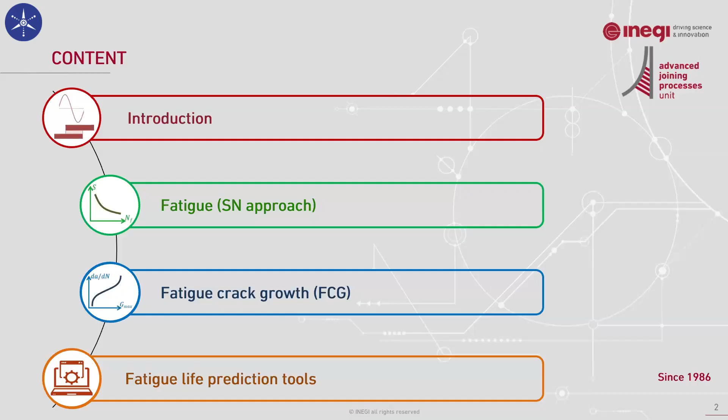A correct selection of material, correct and reliable design, well-planned and properly scheduled maintenance and repair, and development of accurate models for predicting adhesive joint behavior all require accurate and reliable material characterization.

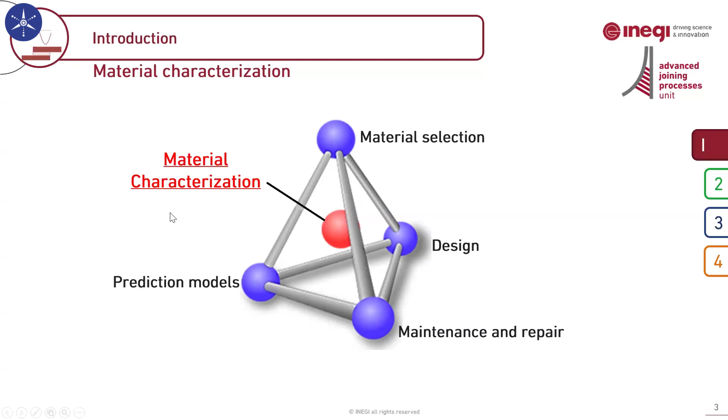So material characterization is key. It generally involves two main stages. First is selecting the appropriate experimental setup, including choosing the right specimen, defining the boundary conditions, setting up correctly the loading condition, and selecting an appropriate measurement instrument.

If everything goes well, we will have the raw data, but the next important step is to treat this data, which is one of the most critical steps in obtaining accurate material properties. A poor choice in data reduction method can easily lead to inaccurate estimation of the material's behavior.

When these steps are performed correctly, we have everything ready to perform a simulation. And in case we select a suitable numerical model, we will be able to simulate the material's behavior in a way that matches the experimental results very closely.

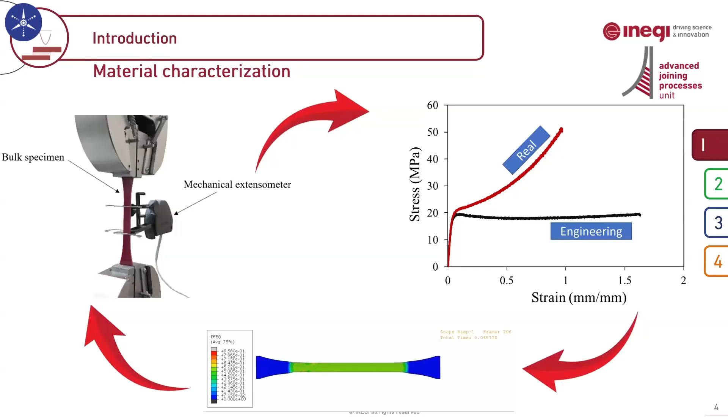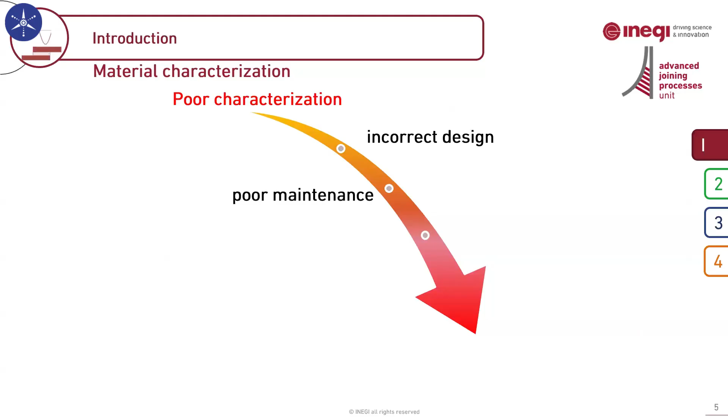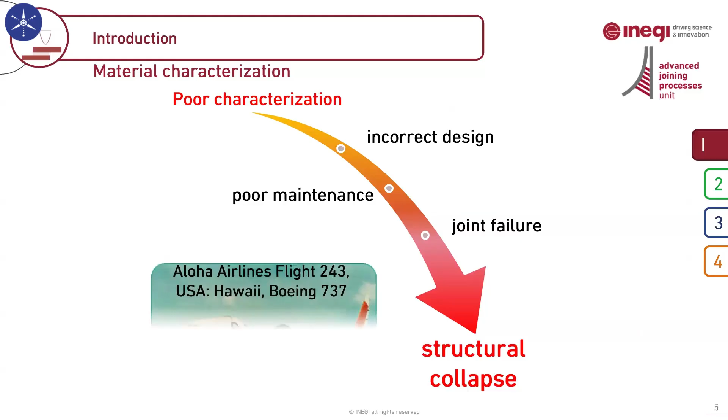If any of these stages fail, it means that we will have the material poorly characterized. Poor characterization leads to inadequate design and poorly planned maintenance and repair schedules for adhesive joints, which in turn increases the risk of joint failure during service. Such a failure can even trigger the collapse of the entire structure, which is, of course, can be a complete disaster.

Characterization can be even more complicated when the loading is not static, but fluctuates over time, which is common in real structures. In this case, fatigue damage becomes the main concern. And if the loading is of variable amplitude, which is the most common loading condition in practice, then characterization can be even more complex.

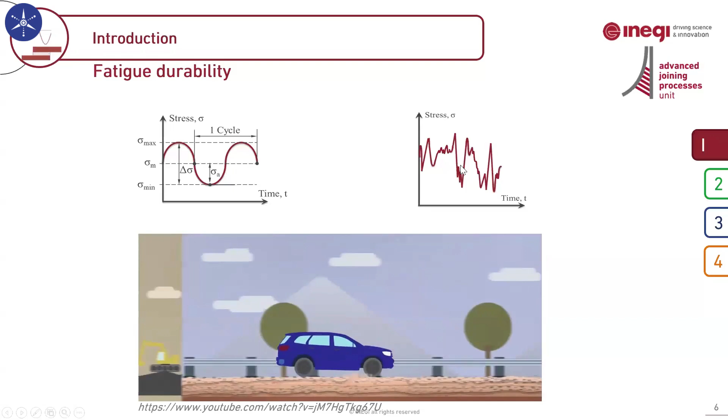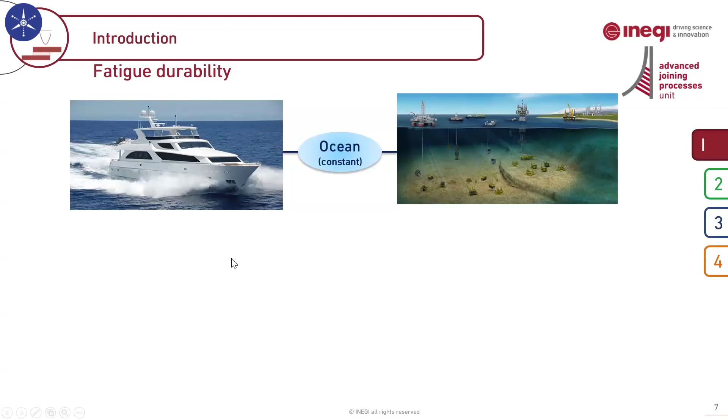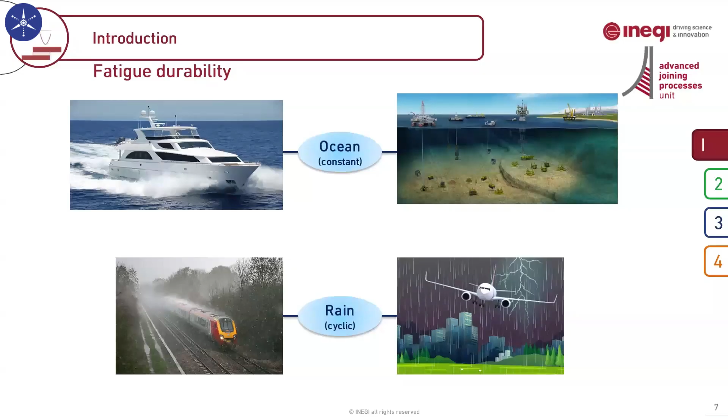Now, imagine your structure is in a humid environment, then you must take into account the effect of humidity, especially for adhesive joints, because adhesives are really sensitive to humidity. And if we make the scenario even more realistic, this moisture level may also vary cyclically, meaning both the loading and environmental conditions are cyclic. You can imagine how complex it becomes to characterize the adhesive's behavior and predict fatigue life under such complicated conditions.

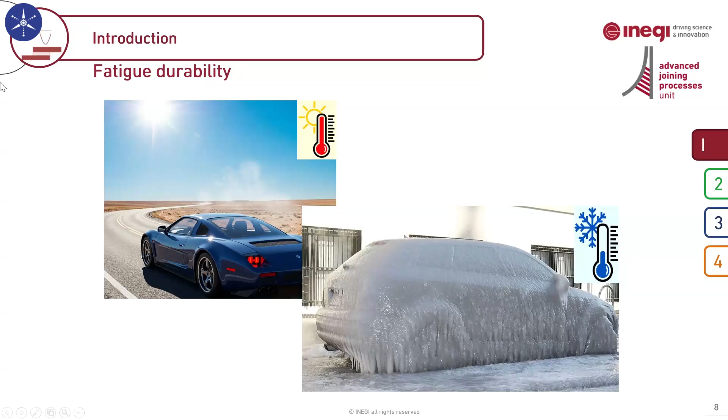And on top of that, of course, we have temperature. In practice, the joints are subjected to a wide range of temperature in service, very low and very high temperatures. And we have to take into account the effect of temperature in addition to all the other parameters that I just mentioned.

Our research group, Advanced Joining Processes Unit, has already completed successfully several projects and is currently also working on multiple industrial projects dealing with fatigue in adhesive joints. These projects have been carried out in collaboration with leading industrial partners, ranging from adhesive manufacturers to end users in various industrial sectors, such as automotive, energy, agricultural, machinery, aerospace, steel, electronics, and even semiconductor industry.

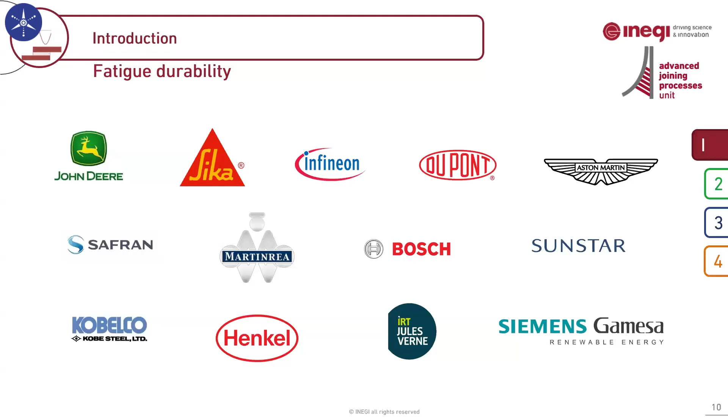Okay, now let's talk a bit more about fatigue in adhesive joints, and I'm going to share with you some of the results that we have obtained so far in these projects.

Fatigue in adhesive joints can be analyzed from two different perspectives. The first one is the SN approach. Here we should obtain a master SN curve. That's the key part of the SN approach methodology.

And with the help of finite element analysis, plus this master curve, plus an effective or fatigue parameter that we should develop or select correctly, we will be able to predict the fatigue life of adhesive joints in real practice. We also have another scenario, another approach based on SN still, but without this master curve, where we will have ideas about the fatigue of adhesive joints based on SN approach, but I will talk about it shortly.

On the other side, we have the fatigue crack growth approach. Here we have a Paris law curve. Again, similar to SN approach, here we should develop and construct a master Paris law curve. So to obtain the master Paris law curve, it's really important to select an appropriate Paris law parameter.

Similar to SN methodology, the challenge here is to understand what's the suitable and appropriate Paris law parameter. In case we select a correct one, then we will be able to collapse all the Paris law curves obtained for different loading and environmental conditions into a single curve, which we call the master Paris law curve.

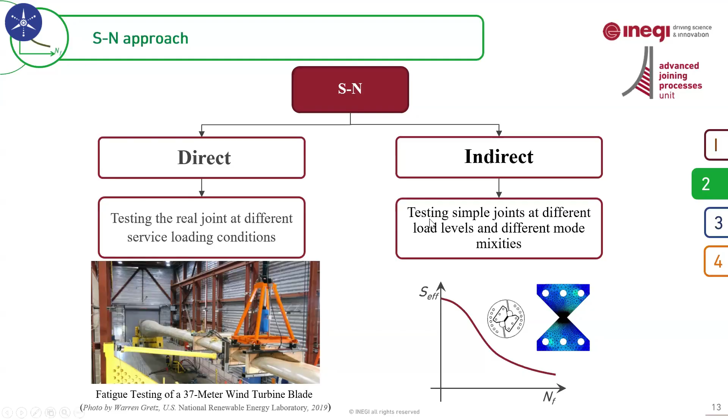Direct methodology can be a bit simpler and less costly, where we can test subcomponents, or perform tests at subcomponent level. We have done this before in our group in some projects. For example, in one case,

we replaced a welded joint with an adhesive joint in part of a boom structure used in agricultural or construction vehicles. The company asked us to perform this replacement and analyze the fatigue response of the welded joints compared to bonded joints. Interestingly, we found that the bonded joints can provide a much longer fatigue life than welded joints, especially for the high cycle fatigue regime.

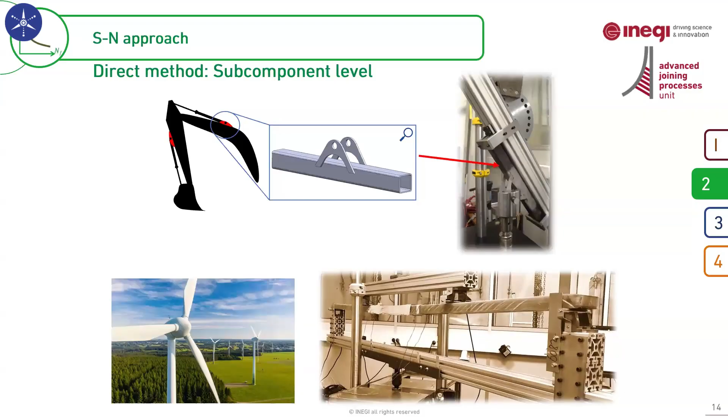Direct method can actually be simplified even more by testing a representative bonded joint specimen instead of a real subcomponent. For example, instead of testing the full boom connection, we could test a single lap joint, because here it's actually a single overlap joint that we can use instead of testing this. Or for skin-to-stiffener tests as part of a fuselage, for example, we can do the test on T-joints with the same substrate materials and adhesive.

Another example is the repaired patch, usually composite patches used for repairing pipelines or even skins. Instead of testing at the subcomponent or full scale component level, we can perform tests on an oversimplified joint, such as a scarf joint or double strap joint. At this level, no special equipment is needed, and the results may be applicable to joints with similar geometries in other structures as well. These are the good advantages of these oversimplifications.

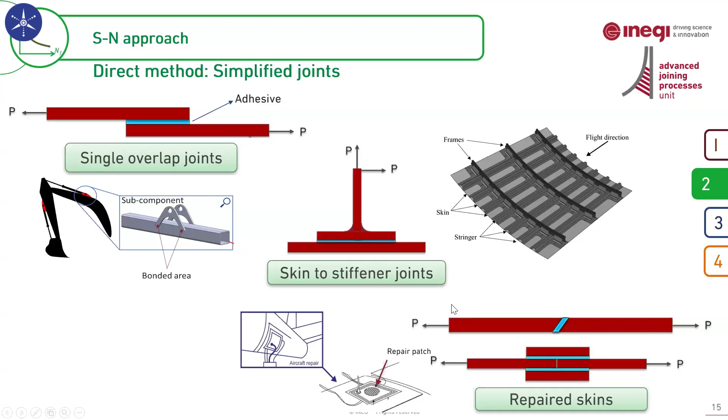On the other hand, we have the indirect method. From the experimental perspective, the key difference in the indirect method is that you must test simple bonded joints under pure loading modes - pure mode 1, pure mode 2, even pure mode 3. So, for example, a single lap adhesive joint is generally not suitable for this approach unless under some specific special conditions. In our work, we have used the Arcan specimens for this purpose.

This specimen meets the requirements for fatigue analysis in bonded joints. The Arcan has the advantage that you can change the loading angle without changing the specimen geometry, the setup, the boundary conditions, or the joint type. And as I mentioned before, the most important challenge in indirect methodology is to select or develop an equivalent fatigue parameter or stress parameter that can take into account the effect of all the important factors that change the fatigue life of that adhesive.

It can be as challenging as a 3 years PhD project, and that's one of the most challenging parts of the indirect method. So despite the relatively simple test that we can perform in this method, the post-processing part is very challenging. But as long as we have this S-effective developed, we are able to construct a master SN curve.

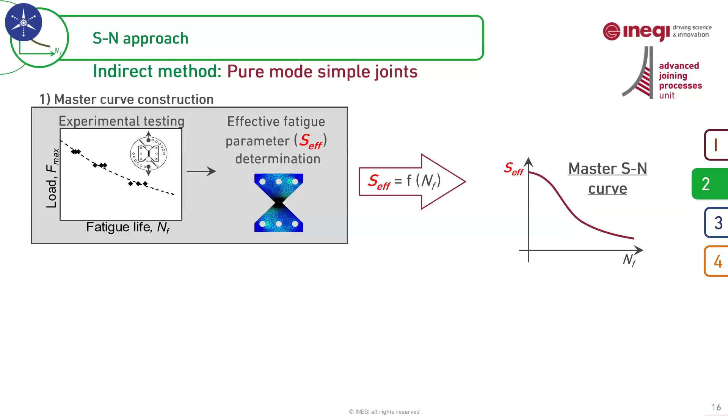Once the master SN curve is obtained, a finite element analysis of the actual joint should be performed, and the fatigue damage parameter S-effective can be extracted from the FE results. By using the master SN curve, we will be able to predict the fatigue life of the real joint. But please be careful, because here we are talking about prediction, not obtaining the real value. This is another important difference between the indirect method and the direct method.

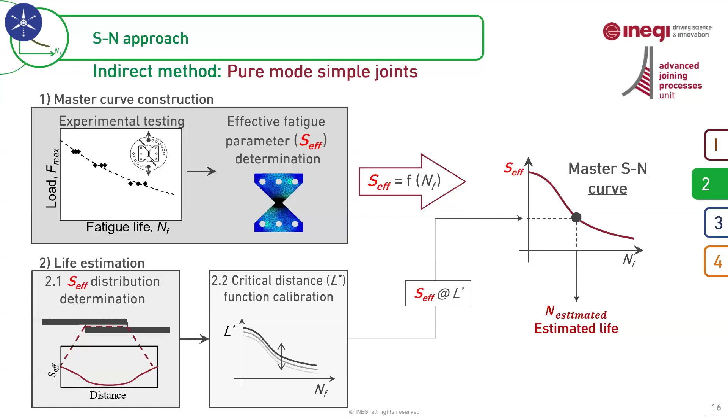Our research group has conducted several indirect method projects as well, in collaboration with various industries and companies, and I'm going to share with you some of these results.

One of the most important parameters that must be analyzed experimentally when using the indirect method is the effect of loading mode. So we have to analyze this effect by changing the loading angle from pure mode 1 to pure mode 2.

In several tests performed on many different types of adhesives, we obtained a consistent finding: the highest fatigue life occurs for pure mode 1 compared to pure mode 2. It means that if joints are subjected to pure mode 1 loading under cyclic loading, they provide a much longer fatigue life than pure mode 2, sometimes by a factor of 10 or even more. If a joint under pure mode 1 lasts 10 years, the same joint under pure mode 2, under the same fatigue load, will last only about 1 year. That's the huge difference between the life for mode 1 compared to mode 2.

But we should note that in reality, stress concentration at the joint edges can strongly influence this result. Stress concentration can produce high peel stresses at the bonding ends or at critical points of the joint, and that can significantly reduce the fatigue life under tensile loading. That's why shear dominant design is still recommended.

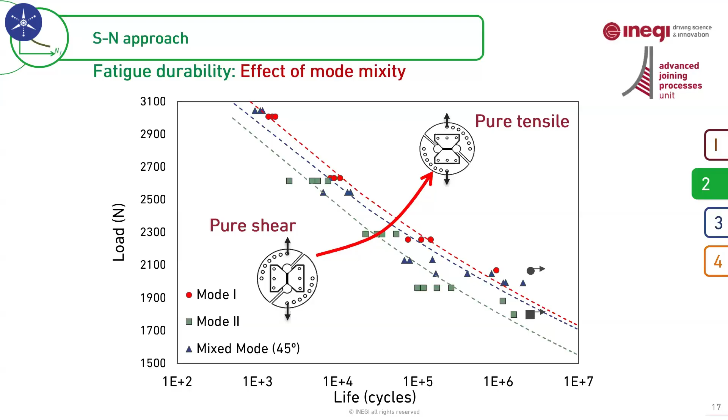There are other reasons why shear loading is better than tensile, and why we have to design joints to be loaded mainly under shear rather than tensile. One of them is the effect of temperature. When we tested joints under high temperature, we noticed that the sensitivity of mode 1 to high temperature is much higher than mode 2. This finding reinforces again the importance of designing joints to be loaded mainly in shear.

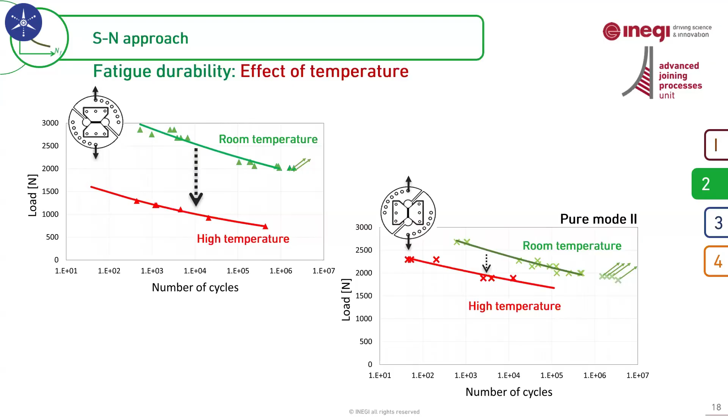Another parameter we analyzed is the effect of moisture. We performed similar tests under humid conditions. Again, moisture causes a substantial reduction in fatigue life in both loading modes, but mode 1 is much more sensitive to moisture than mode 2. That's one of the reasons, again, that designing joints to be loaded in shear is recommended.

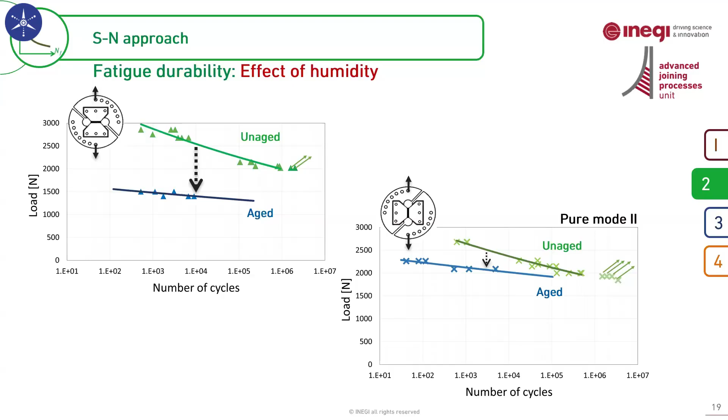I talked about cyclic humidity in the introduction, and we have investigated this phenomenon in detail in a PhD project in our group, with several important findings. One key observation is that the moisture ingress rate changes from cycle to cycle and stabilizes after a few cycles.

We found that the rate of water uptake, the diffusion coefficient, is much higher under cyclic aging than constant aging. It means that if the environmental condition is cyclic, the joint will experience a higher rate of degradation in properties than under a constant humidity level. This means that for characterization of adhesives in terms of humidity, if you perform a constant aging test for a joint that in practice is subjected to cyclic aging conditions, you will most probably overestimate the service life, which is dangerous for a critical design.

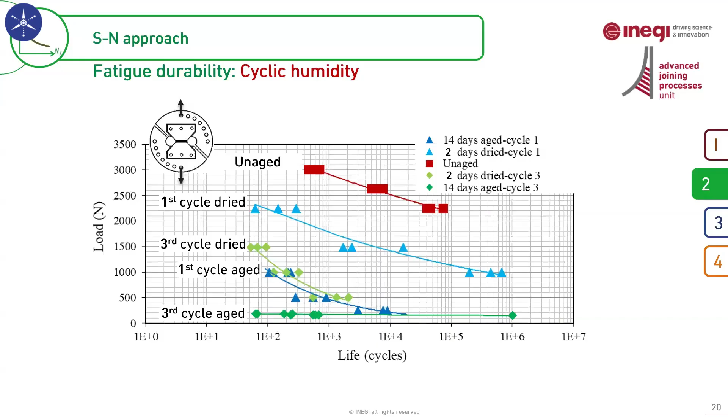It means that even without performing tests or experiments, we are able to have a very rough idea about the fatigue life in case we know what the load ratio is.

Our group activities are not only concentrated on experimental studies, but we have also been active in developing fatigue life prediction models for bonded joints. This is one of the most recent SN-based models that we have developed, and it was actually developed in a PhD project. I would say this is one of the most universal fatigue models developed so far for fatigue life analysis of adhesive joints. This model can provide a good prediction of fatigue life for different joint geometries, at different loading angles, different materials, single lap joints with different overlap sizes, different substrate materials, and even at different environmental conditions, humidity, and temperature.

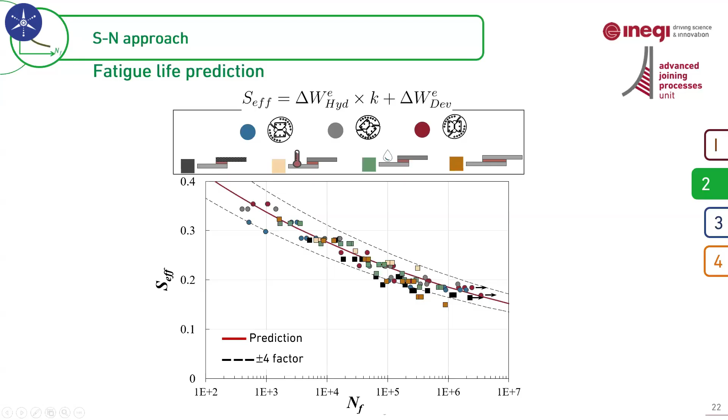Now I'm going to talk about fatigue crack growth. As mentioned before, analyzing fatigue crack growth in adhesive joints is more complex than working with the SN method. Here I'm going to show you some results and share some findings and insights.

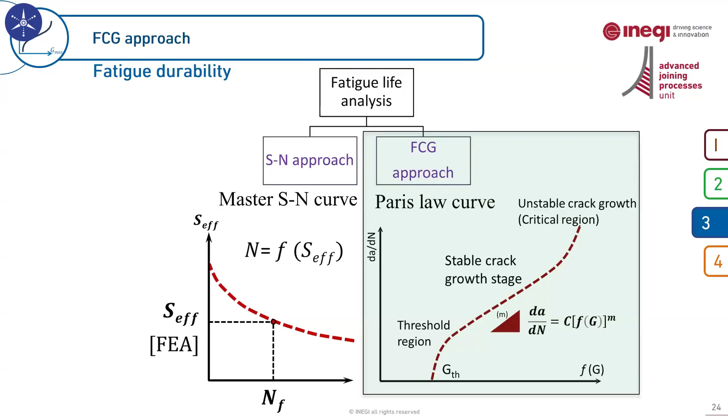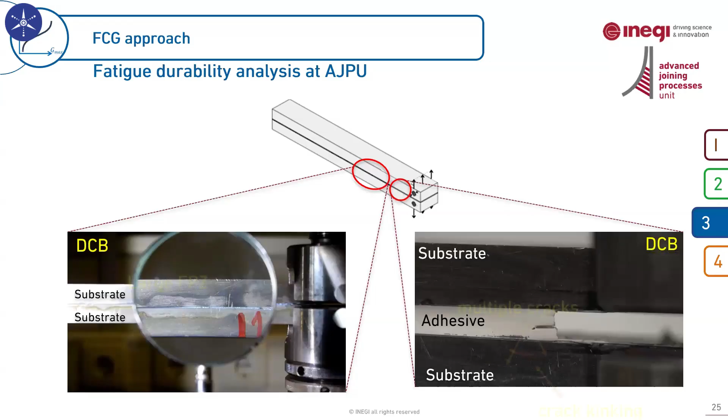Here I show two examples of DCB joints tested under pure mode 1 fatigue loading conditions, and several phenomena are visible in the adhesive layer. We have here a very ductile adhesive with 150% elongation at failure, a methacrylate adhesive. You see a very large whitening area. This is actually a magnifying glass, we try to zoom in a bit more to see the very thin layer of adhesive.

At real size it's hard to see the adhesive layer, but here you see we have a crack, the crack tip is somewhere here, and these are the large whitening area and process zone ahead of the crack tip. The energy here is spent partially in developing this large process zone ahead of the crack tip, and also for opening the crack itself. But we need to be careful here because the crack...

...opens within an already damaged area. So the energy that we finally measure from this test is the energy of the system, both the whitening and damage zone plus the opening. Then using this energy measured cycle by cycle, we can construct and plot the Paris law curve.

On the other side, we have another DCB tested under pure mode 1 loading condition. This is not a very zoomed view. Here we have a very thick layer of adhesive, 4 millimeters thick, and we have also several phenomena here.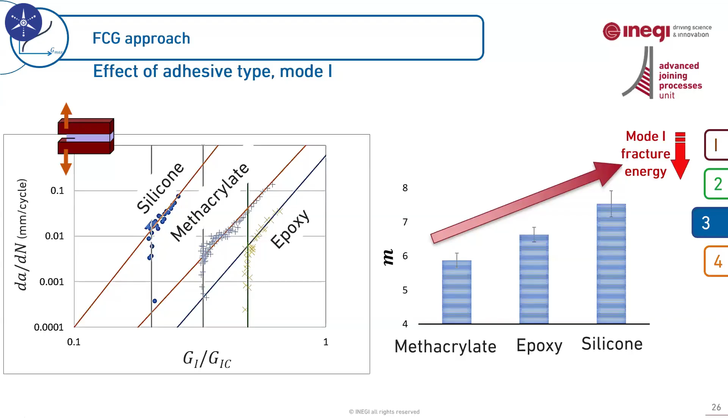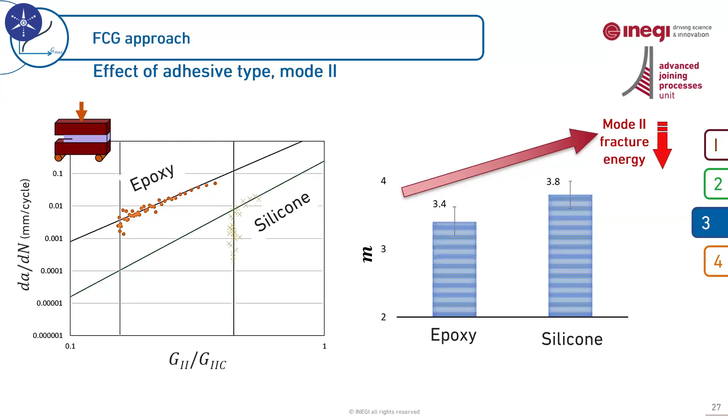But as a general trend, we can say that the lower the mode 1 fracture energy under quasi-static loading condition, the higher the M value under cyclic loading condition. A similar conclusion holds for pure mode 2 loading, where we use the ENF joints for fatigue crack growth under mode 2 loading condition. And again, we can say the lower the mode 2 fracture energy under quasi-static loading condition, the higher the M value under fatigue.

We have also conducted this test under various mixed mode loading angles. And when we plot the M envelope for different mode mixities, we find that despite the large difference in static behavior among the adhesives that we have tested, their fatigue crack growth behavior doesn't differ significantly. The M value more or less remains within a relatively narrow range for all loading modes. But a general trend for all mode mixity is that in case you have a lower fracture energy under quasi-static, you should expect a higher M value under fatigue.

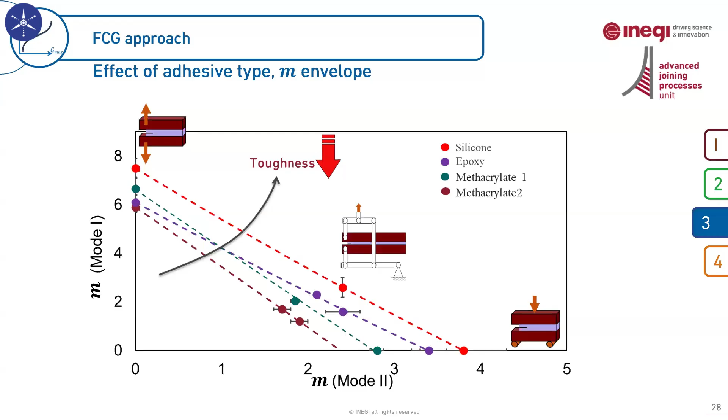I mentioned before that in fatigue crack growth characterization, we need to search for a good Paris law parameter to be able to construct a master Paris law curve. And here are the results. We did this test on a methacrylate adhesive. By changing the Paris law parameter and by including the effect of R ratio, we were able to collapse all these curves into a single curve.

Using this curve, you just need to analyze probably numerically the energy. And by knowing the loading condition, you will be able to know what's the rate of crack growth for all these loading scenarios. So you just need to test one of them, and then you can precisely predict the dA over dN for the other three.

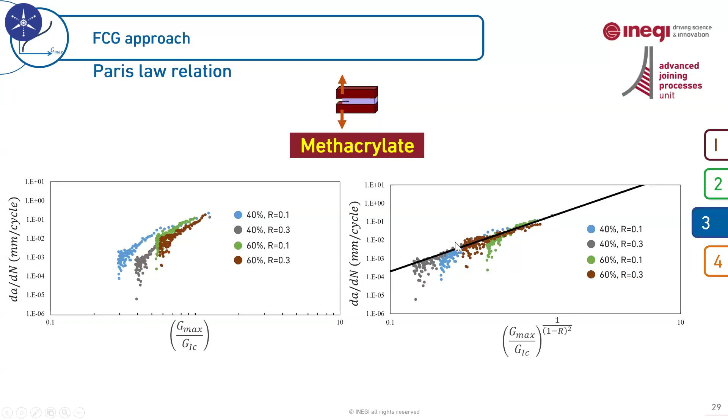That's also very important when we characterize adhesives in terms of fatigue crack growth. We need to try to take into account the effect of all important parameters to be able to construct this master Paris law curve.

Loading frequency is an important but relatively overlooked parameter in research. Fatigue life can be highly sensitive to loading frequency. And by increasing the loading frequency, the number of cycles at failure increases.

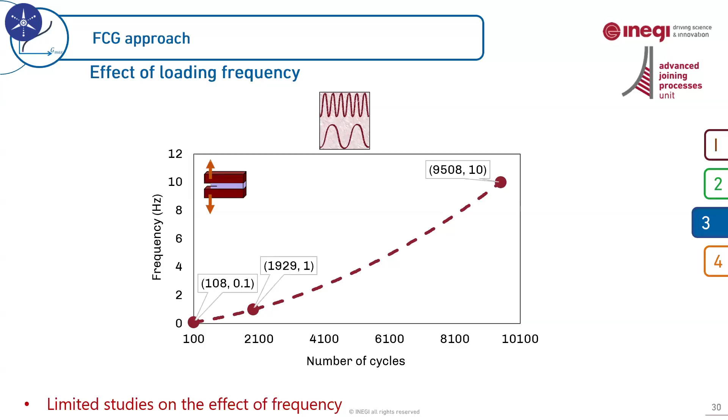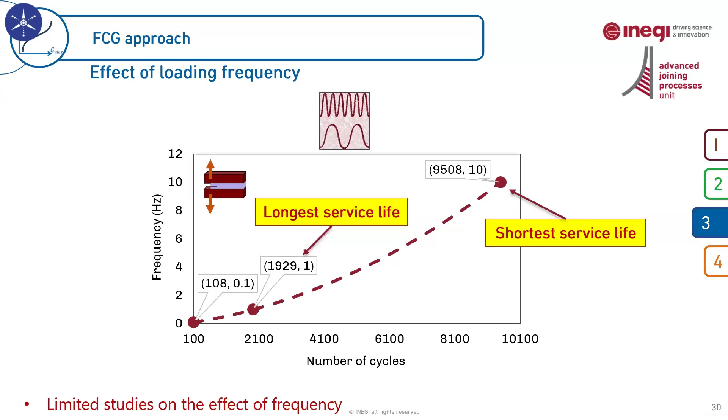While high frequency testing is sometimes used to make the running time shorter, it can easily lead to misleading results and can overestimate or underestimate the service time. Here, for example, in our results, the longest service time occurred at 1 Hertz, and the shortest service time was for 10 Hertz. When we analyze adhesives under cyclic loading, and we change the frequency to make it different from real practice, we need to take into account all these important points.

As we discussed earlier, the Paris law consists of 3 main regions: threshold region, stable crack growth zone, and finally the unstable crack growth part. We have 2 different strategies to analyze the fatigue crack growth in adhesive joints. The test can be load control or displacement control.

In load control, the test starts from a threshold region. Then we move to a stable crack growth part, and then finally the joint fails with an unstable crack propagation.

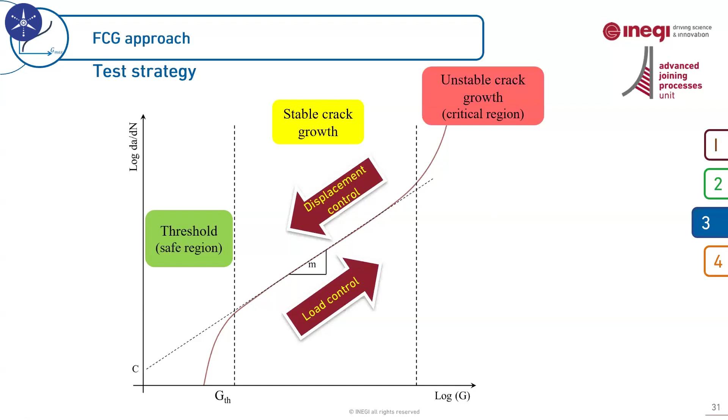In displacement control, the test starts with an unstable crack propagation. It moves backward to stable crack growth, and finally we reach a threshold region. When we reach the threshold region, the crack propagation stops and the joint doesn't fail. In load control tests, usually we need to test several joints at different loading levels to be able to find a real threshold value. But in displacement control, only a single test can be enough to obtain the threshold.

We have analyzed this parameter on adhesive joints, and we noticed that the choice of test method can lead to significantly different results for fatigue crack growth in adhesive joints. Our results for a polyurethane adhesive showed that the threshold fracture energy obtained based on displacement control is a bit lower than the threshold energy obtained based on a load control strategy.

But the good point here is that for both cases of load control and displacement control, the M values were similar. So in case we perform a test under load control or displacement control, probably M would be the same for both approaches, but the threshold might be different. We need to be very careful, especially if you design the joints based on safe life philosophy.

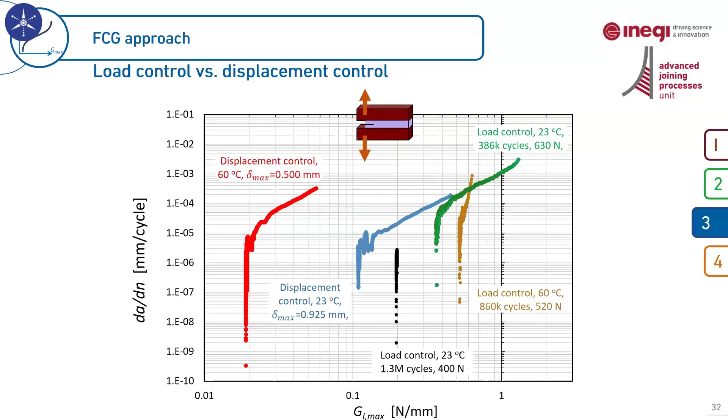Our group has also previously proposed models for various loading modes to predict the fatigue crack growth in adhesives. All of these models are based on cohesive zone modeling. Compared to the traditional SN approach, fatigue crack growth simulation and modeling requires more extensive testing and more knowledge - finite element knowledge, fracture mechanics knowledge - and it's more challenging.

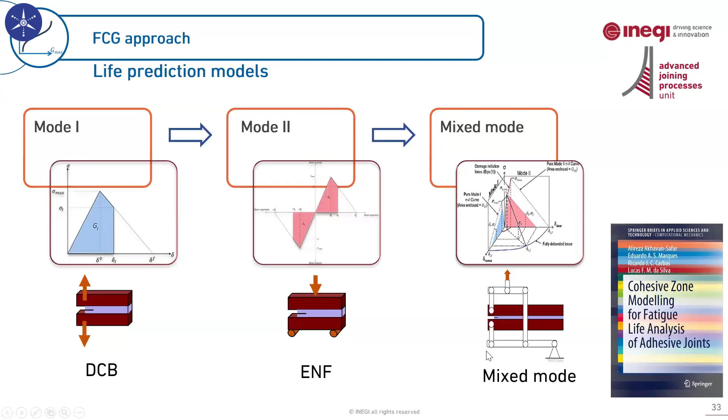We have also actually published a book on using cohesive zone modeling for fatigue life analysis of adhesive joints. This is one of the models that we have developed.

One important point in fatigue crack growth analysis of adhesive joints is to understand and know how the fracture properties degrade cycle by cycle. This is an important parameter. By knowing this degradation rate, we have obtained this formulation to define the rate of degradation, then we know how to degrade the traction separation law used for cohesive zone modeling approach for predicting the fatigue crack growth life of adhesive joints.

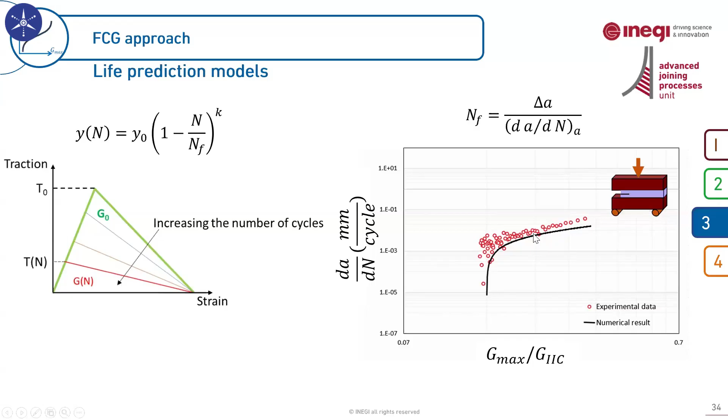And here you see a comparison between numerical and experimental results.

I talked about two different approaches: static SN approach and fatigue crack growth approach for characterization of adhesives. And I mentioned that these are actually really challenging tasks if we are going to characterize real joints in real scenarios, in real world applications, in industries with complex structures and complicated loading conditions. But I'm going to talk about these challenges a bit and also solutions here.

We know that adhesive joints are widely used in aerospace, marine, automotive, oil and gas structures, partly due to their relatively superior fatigue life compared to other joining methods. However, predicting the fatigue life of these joints is actually a challenging task that requires knowledge across multiple disciplines.

And the problem is that we have too many models already developed, and we need to understand which one is the most appropriate one to characterize, simulate, or predict the fatigue life of the joints that we have in our structure.

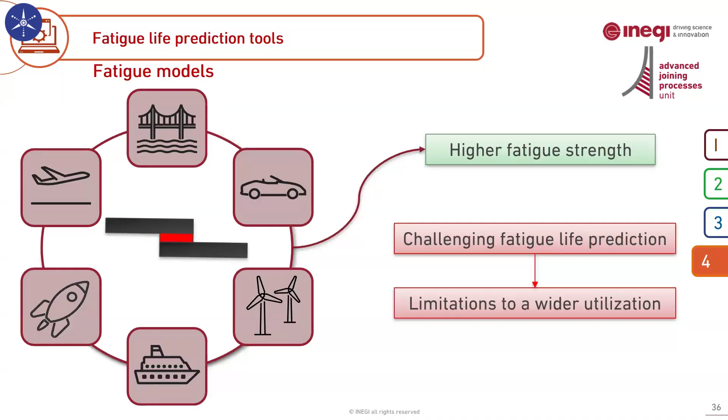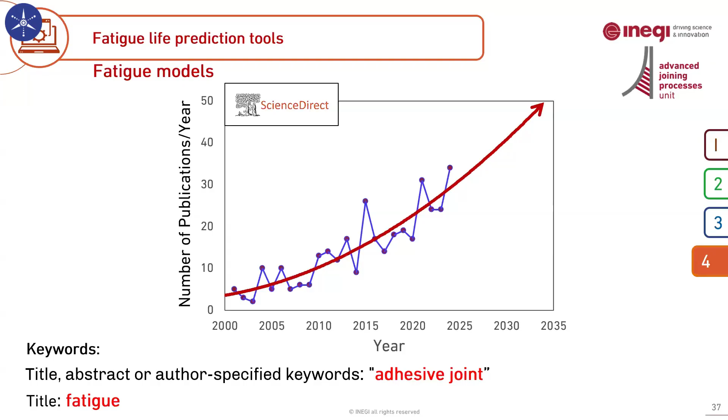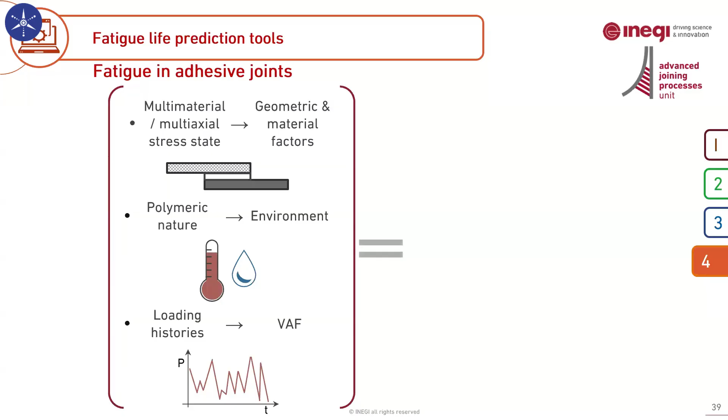But unfortunately, none of these dedicated adhesive joint fatigue models can be found in well-known commercial fatigue analysis software packages. On one hand, we are dealing with a complex phenomenon in which fatigue behavior is influenced by many parameters and different loading and environmental conditions that make the analysis even more challenging. On the other hand, fatigue of adhesive joints remains a critical concern for industrial applications. So what's the solution?

The solution, we believe, is to develop special tools dedicated for fatigue life analysis of adhesive joints using models that are dedicated for fatigue life assessment of adhesives, and also try to simplify this task and this analysis as much as possible for end users in different industries.

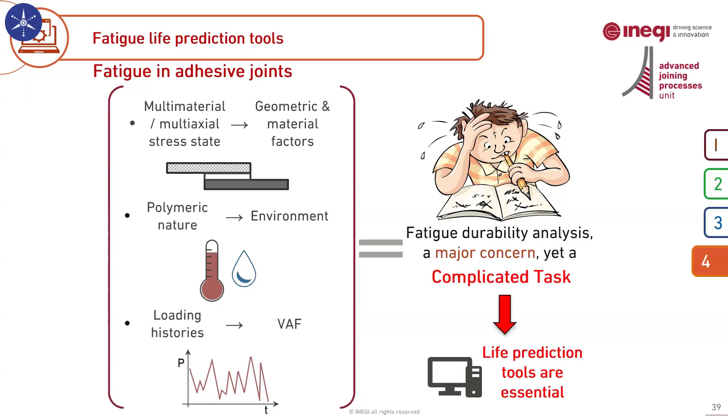In July of this year, about 5 weeks ago, we launched a consortium comprising leading edge companies from various industries. Within this consortium, our research group is leading a 3-year project, and we are going to develop fatigue life analysis tools and deliver them to the consortium members.

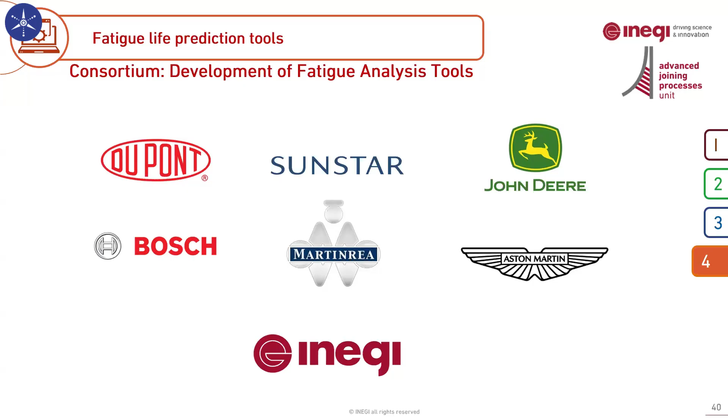The first tool we are going to develop is called BondLife, based on the SN approach. It's an innovative software package specifically for SN-based fatigue life prediction of adhesive joints. This software allows users to predict the fatigue life of complex structures with multiple bonded regions and even different types of adhesives. BondLife provides users a list of fatigue models to select from, and there is also a material library available, along with several other tools and features.

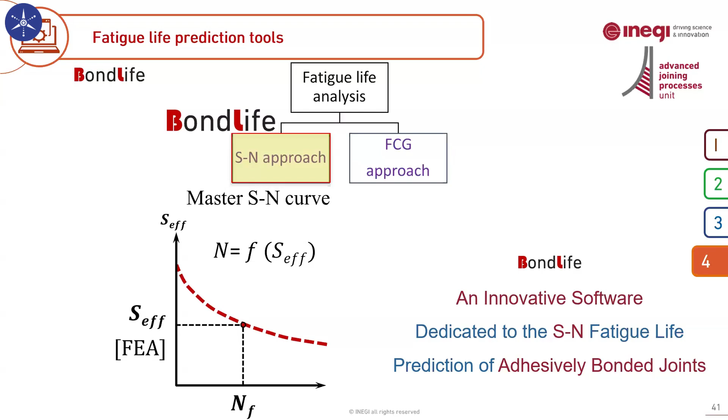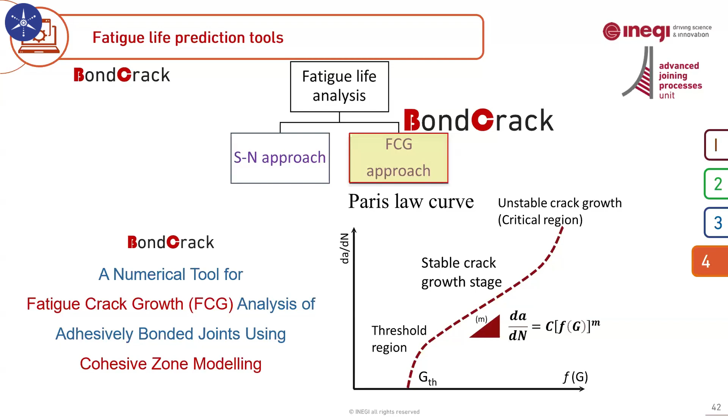The other tool we are going to develop as part of this consortium is called BondCrack, which focuses on fatigue crack growth analysis in adhesive joints. It's designed to minimize complexity and enable users, even with limited knowledge of finite element software, fracture mechanics, or fatigue analysis, to still perform simulations and predict fatigue crack growth in real adhesive joints.

The bonded structures that BondLife and BondCrack can analyze can be highly complex, with multiple bonded areas made from different adhesive types and subjected to variable amplitude loading. The consortium project also includes a comprehensive experimental program, not covered here due to the short time for this webinar, which will cover fatigue, static, and fracture testing of stiff and flexible adhesives.

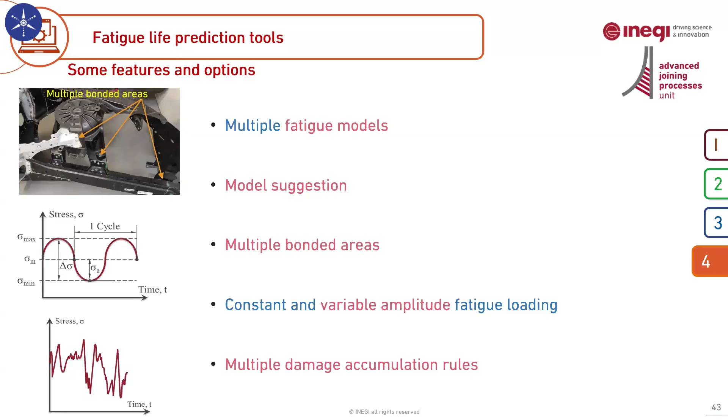The good news is that the consortium project has just started, and it's really fresh—it began just a few weeks ago, and we are at the very early stages. We are still welcoming new members and new companies, and we invite companies interested in this topic to join the consortium and benefit from the advantages and products that will be developed during this project. Thank you very much for your attention.

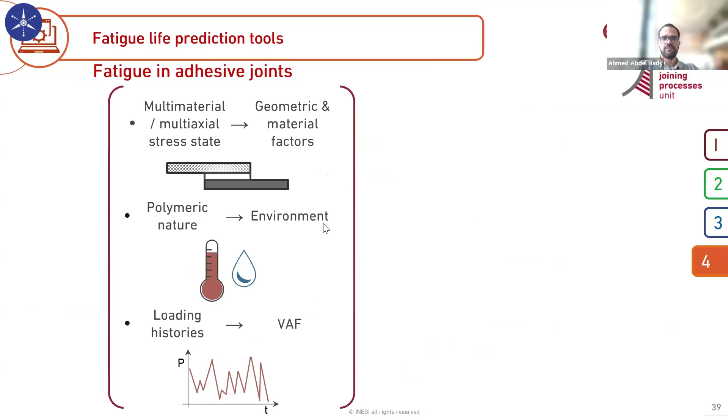I think the main point from Chaula is that the sample now faces two fatigue cases. The first one is the stresses that come from the humidity cycle, where you increase the humidity, reduce it, increase it, and reduce it. This causes a little bit of strength degradation, let's say. The second process is the fatigue loading, where you're loading and unloading, which means the strength will also degrade because of this. So the question is, did you decouple this effect? If we have a 10% reduction due to humidity and a 10% reduction due to fatigue loading, how do we decouple this? Do you have an idea about this, or I don't know if the question is clear?

Actually, the second part was not very clear to me, but maybe I can explain a bit more. Here, you see my screen, right? Yep. Okay, so for example, here we are talking about cyclic aging plus cyclic loading.

It means that we perform cyclic aging first, and then we test them under cyclic loading. Under cyclic aging, we have a degradation in properties. We also have static results. We have published this data in a paper, and we see a degradation in properties, which is a function of the aging cycle, of course. But after that, we perform cyclic loading, and we know the properties degrade cycle by cycle until the joint fails, right?

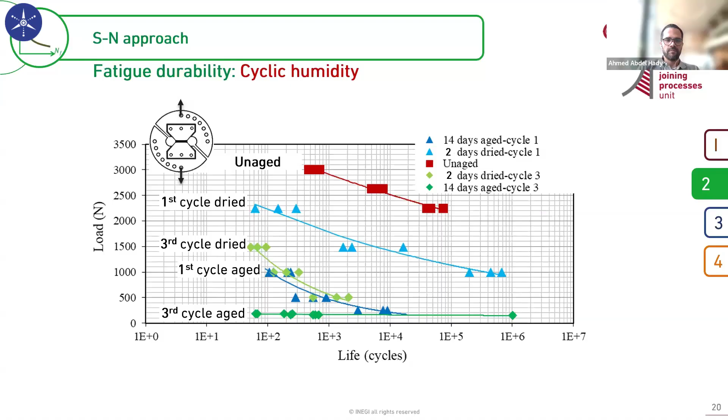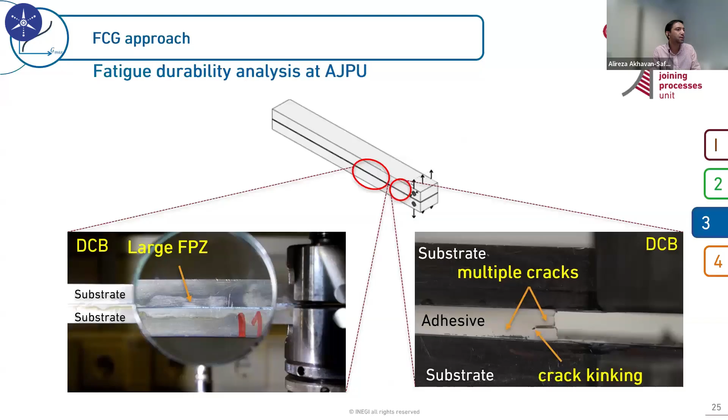Thank you, again from Future Pipe Industries. They ask, what technology did you use to detect the failure? Is it only visual inspection? I think it's in the videos you presented for the fatigue, how you detect the crack. Yeah, no visual inspection, it's hard to detect actually. Yeah, it's hard to detect the crack propagation visually.

And we need to use a very specific data reduction methodology. We use a compliance-based method, which means that we analyze the rate of increase in the compliance of the joint cycle by cycle, and using this increasing compliance or reduction in stiffness of the joint, we have an accurate idea about the crack size.

But in such complicated conditions, we have to consider an equivalent crack size, meaning we need to take into account the effect of the damage zone as well, because the total energy spent for crack propagation is partially spent on the development and evolution of the damage, and part is for opening of the crack. But as I mentioned, the crack doesn't open in an undamaged zone. We should have a damaged area first, and the crack opens in an already damaged region. So the key point is to select the correct data reduction approach for analyzing these tests.

One more question: can you conclude, for different types of adhesive, which properties will be most important to determine the fatigue life of the joints, and what's the physics behind that? What's the parameter or property we can use to say this adhesive will sustain longer than another? I know it's quite generic.

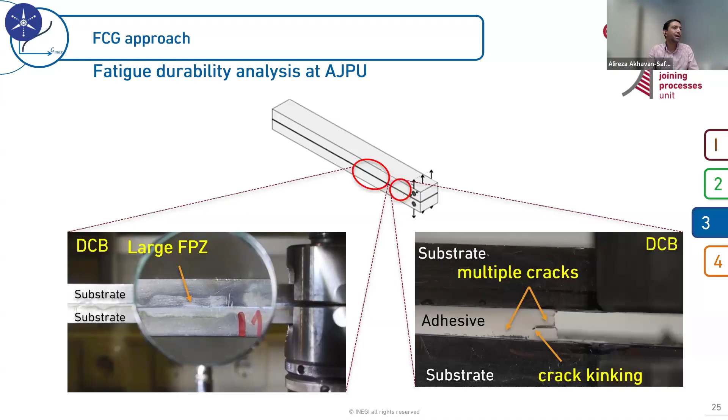Yeah, it's a very general question. I have some slides to show you. For example, even without any experiments, you can have a rough idea about the total fatigue life of adhesive joints for different types of adhesives. But in a real scenario, we have very complicated geometry and loading conditions, and it becomes difficult to have that rough idea.

Loading condition, frequency, and all these parameters I mentioned are very important, so we cannot make a general conclusion about which parameter is most important. But one of the important parameters is the maximum fatigue load and the load ratio. If you are close to the static strength of the joint, the life will be short. For example, above 80% of static strength in fatigue loading, you're close to 1,000 cycles. At 50%, you're between 100,000 and 1 million. Below 50%, the life can be over 1 million cycles, if you keep the other parameters the same.

Yeah, I think this is for the testing parameters. But I think the main question is about the property of the material. Which property can we say is most important in determining the fatigue life of the joint? Is it elastic modulus, strength, yield strength, plasticity? If it has a high elastic modulus, can we say the fatigue life will be quite good?

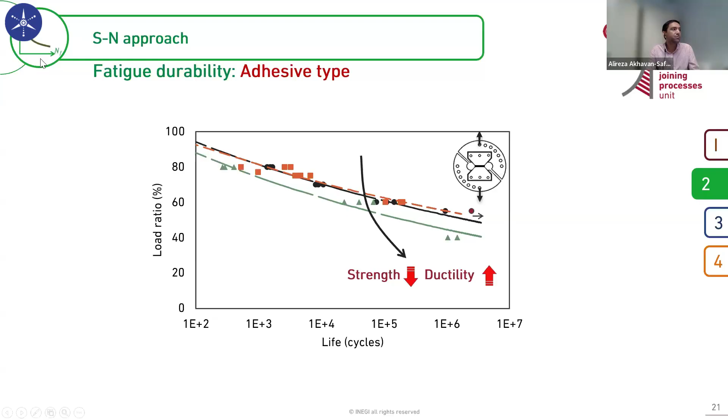Yeah, it highly depends on the parameter that you select as effective. Here, for example, we have a parameter that can take into account the effect of temperature as well. When we change the temperature, we are actually changing the behavior of the material, it's like testing another adhesive.

In case you know the important parameters that can change the fatigue life, another important question to answer is where this parameter must be measured in the joint. If you can correctly address and answer these questions, you can change the temperature and just check the stress level at a critical distance, then use this stress and strain components to obtain the effective S parameter. So it's just a matter of this parameter. If you can select and develop a good one, you're on the right track, and you can predict the fatigue life for high temperature as well.